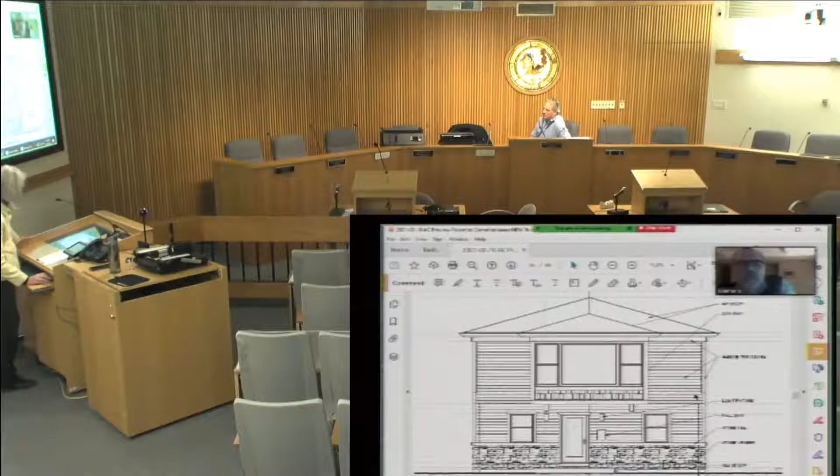There's something a little troubling to me in this elevation. Actually, a couple things. I'm not quite sure, are you showing siding on the whole house now? Yeah, stone veneer for, I guess, kind of a wainscot.

Is that new or existing stone veneer on the base? It will be new. Okay, and what is that above it? The Hardy siding? You've got a couple problems. First of all, you don't have enough masonry on this, because on a project of this scope, you need at least a minimum of 50%. So there's a problem in that you're not doing that.

And secondly, if you go back to your drawing, your second floor window sticks out like a cyclops when you're looking at this elevation. You've got two very small windows on the first floor, and then this large window on the second. It just doesn't scale out, it's top heavy in design. So the solution is less obtrusive on the top and a little larger on the first floor.

For windows? Yeah, it just doesn't look right. That's for the front of your house. It'd be one thing if your living room was on the second floor looking out, but you've got these two small windows on the front. I know the one on the right on the first floor is probably existing to remain, correct? That's correct. The one on the left, you're taking out a large picture window and putting in a smaller one. Conceptually, I'm curious about that.

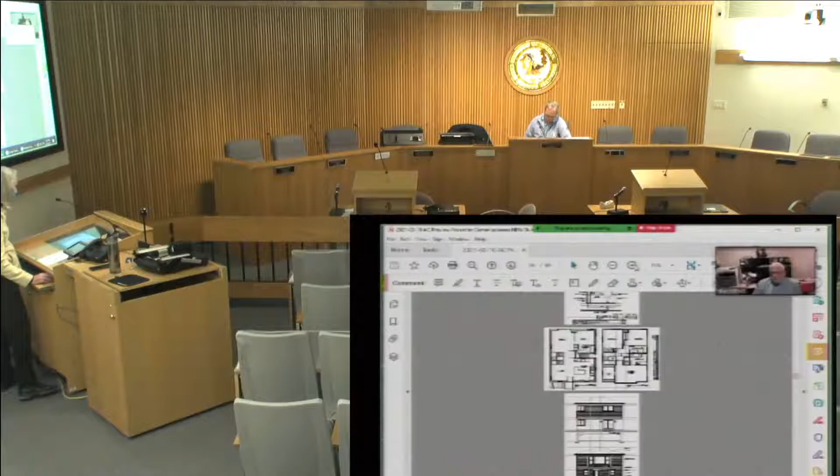There was talk about having this be like a permanent bench. If they put a permanent bench in there, do they have to go to the zoning board? Well, if the floor joists protrude out, then it's the same thing, because the bench could be removed. So we would allow it if the bay was sticking out above the floor line.

So I'm just suggesting if they did 2x8, they can give it the look without necessarily having the floor area underneath it to walk on. Sir, do you understand what he said? Yeah, I'm writing everything down. I'll discuss it with the architect as well. Sure, and Nathan will talk to you about it too. Okay, thank you.

Okay, so Tom, do you have enough to make a motion? Yeah, I do, Mike.

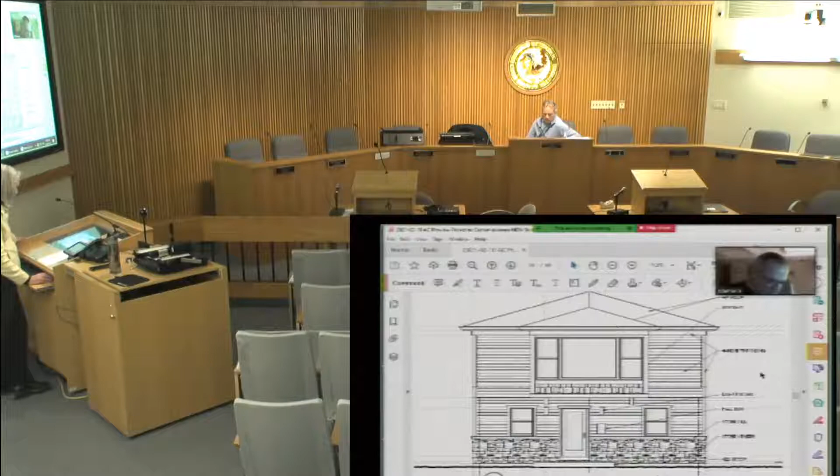Some thought might also be given to reducing the size of the second floor bay, just to make the first floor windows and the second floor windows look a little bit more compatible. And I think that should get you to the 50% masonry requirement, and there is still the need for the addition of a sprinkler system.

Anybody second? Okay, all in favor? Aye. Any opposed? No opposed, so passed.

Please work with staff and they'll take you through all this stuff, because I'm sure some of this gets lost in translation. Okay? All right, good luck. Thank you. Sure.

We're going to move on to case 2021-005A at 5225 Golf Road by Chris Lynn DMV. It's a commercial first floor addition. Staff comments are that staff has no objections with the overall design. Technical items to be addressed include a tree removal permit, rooftop HVAC screening, and possible additional formal review of the existing special use permit by staff, not by us, the Plan Commission, and/or the Village Board.

Who's representing the petitioner? We have two. Mike Mathis from Lindenwood Park. Can you raise your hand? And Ken Just as well. Who else? Okay, Ken, do you swear or affirm to tell the truth, the whole truth, and nothing but the truth?

Great, okay, let's take a look at the drawing. So Golf Road Terminal, north is to the left on this elevation. The proposed addition is in this area. Actually, the renderings will probably do it better justice. Here's one of the renderings, looking northeast.

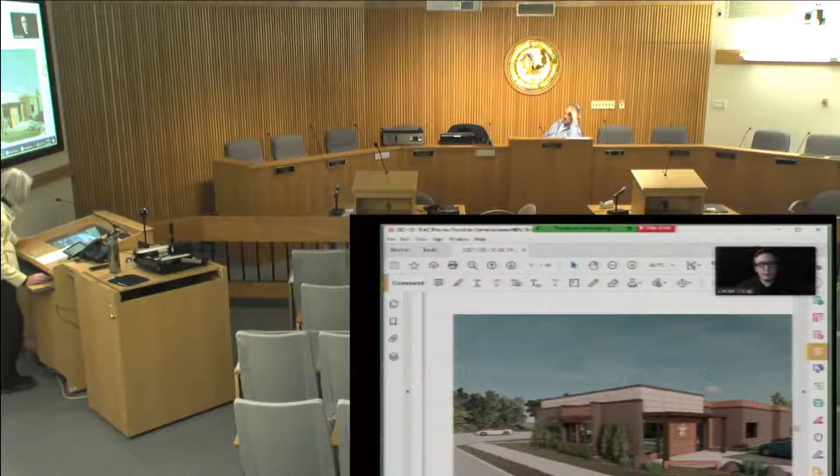So that's the addition we're looking at, right? We're protruding to the south into the parking lot area. Yes, so it's in the rear of the building, not Golf Road facing, correct? Correct. Okay, and we're matching all existing materials? Well, the existing brick is going to be painted. So it's not just the addition in the back...

This is a whole new look? Carrie, could you put up the pictures? It's got a mansard roof, Mike. Yeah, so we're updating it, bringing it into the 21st century. Good, we're going to get rid of that? Yeah, so we are doing facade enhancements around the perimeter. Sure, no, it looks great. So it's an addition plus an elevation update. Yes. Cool, what's the material at the top, at the parapet?

It's going to be a composite wood. Okay, so is the building getting re-roofed? Yes. Okay, good. And just for clarity, that wood piece you see across the top is an extension to the parapet, so we're adding that height to the structure. But that parapet, according to that elevation, looks like it's set back a little bit, correct? Yeah, we're building that parapet wall setback to provide a step from the masonry cap to where the wood cladding extends up.

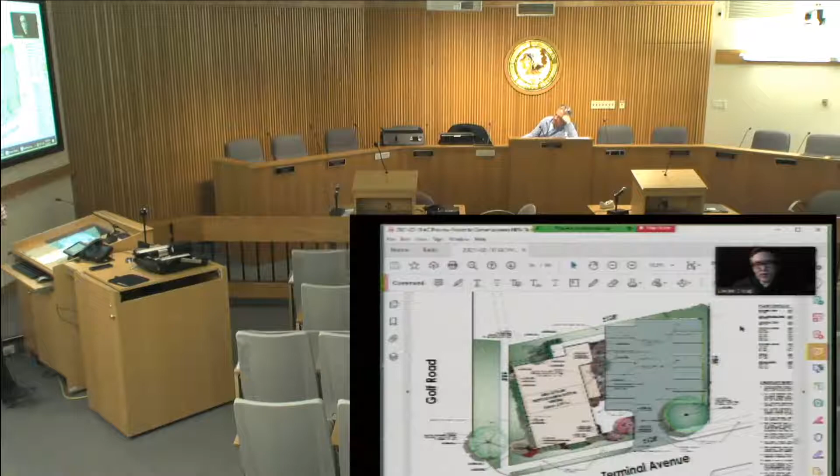But certainly, I know he's listening on the meeting, and we can look at that again with him. Yeah, just something like crab apples, they come in all different forms, and you might be able to get the same form, they'd be a little tougher with all the hardscape. We're just trying to make sure you don't plant a tree that in 5 years you're not gonna be happy with.

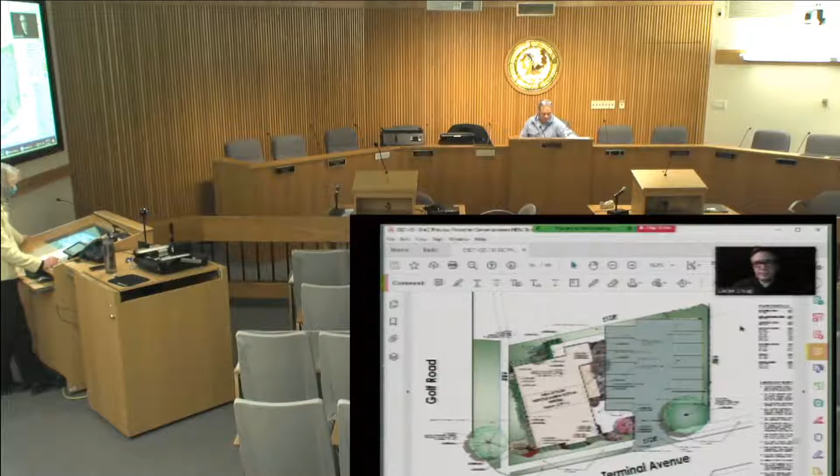Okay, great. Does somebody want to make a motion to approve? Okay, I'll make the motion. I move that a certificate of appropriateness be granted to case number 2021-005A at 5225 Golf Road as presented. Anybody second? I second. All in favor? Aye. Any opposed? No opposed, so passed. All right, thank you very much, gentlemen. Good luck.

We're gonna move on to the final case, case 2021-008A at 3900 Dempster Street, Dunkin' Donuts, new construction. Staff has concerns with the design. I'll read these, but I understand there are new elevations being presented tonight. Suggested modifications include more masonry, fewer signs, and reworking elements of the corporate prototype so the design is more site-specific to this scrape and build project. The proposed building setback is roughly 70 feet, greater than the existing 46.5 feet setback, and is currently aligned with other buildings on the block, including ZAD and Burger King. Therefore, it's recommended that features be added to the site plan to continue this line.

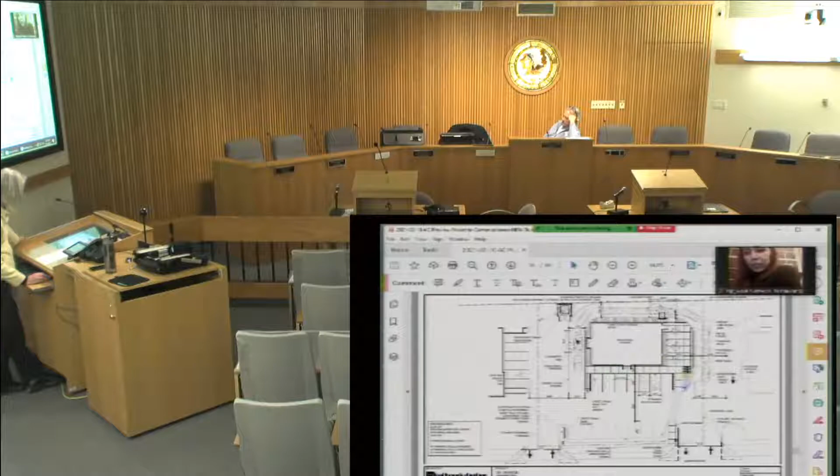Okay, so this is existing—Zad is here, and Burger King is roughly over here. And the proposal is a building set farther back, with a drive-through. Is this the current proposal or a revised proposal?

The site plan didn't change, just the elevations and signage.

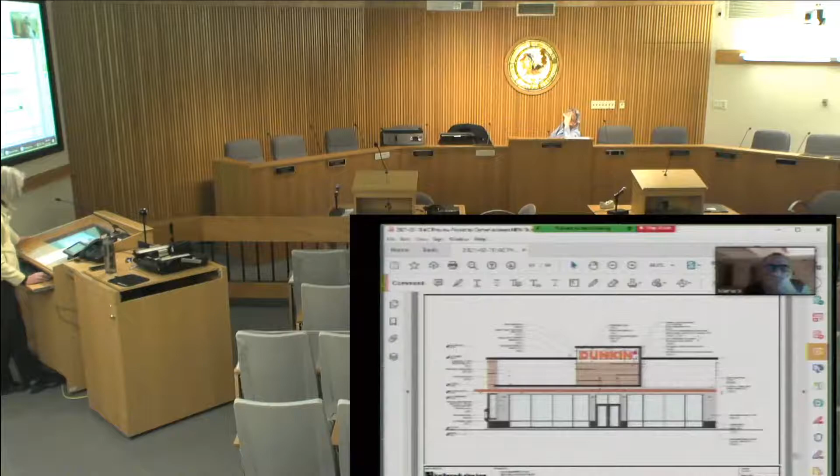I thought when I saw the earlier renderings this was a darker building, and now it seems lighter. Does somebody from Dunkin want to respond? Am I wrong or am I right? The colors haven't changed, this is the architect speaking—we played around with the massing a little bit here and there, but those are the standard brand offerings.

Stephen, give me a quick rundown of your materials, starting at the top and going down. Starting at the top, it's typical metal coping, then cementitious panel systems throughout. There's a Hardie board, another panel system at the sign itself, as well as down below. The orange band is a metal element added to the building that wraps around.

And then just a lot of storefront on the front elevation. If you look at the side elevation, you see a lot of color variation, that dark charcoal at the rear that starts at that point and wraps around the back of the building—again cementitious panels, but that's lap siding.

So it's in theme with the newer Dunkin' Donuts. That's correct—the newer Dunkins have gone through a lot of iteration changes to come up with it. The latest and greatest.

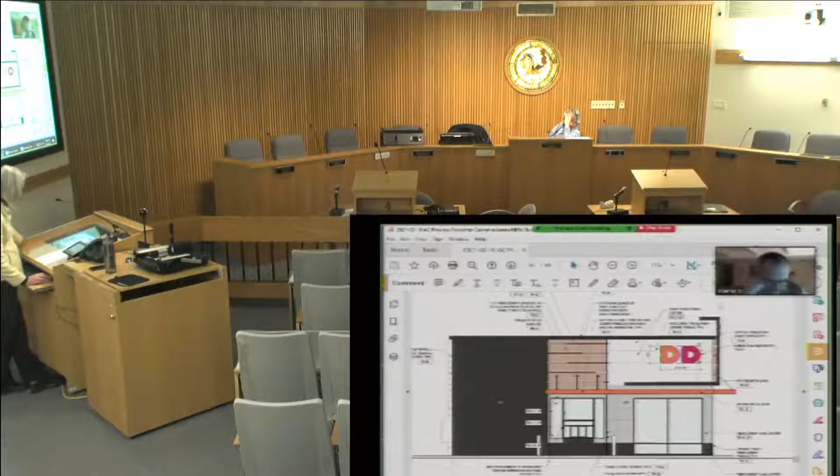Well, I don't have any necessary jurisdiction to say move this thing closer to the front line of the others—that would be someone else within the village. But as I look at these elevations, I personally don't have any issues. I don't know if any of the commissioners have any issues.

Mr. Chairman, if I may, the main reason the building was pushed back is to rectify the drive-through experience—if someone wants to put up the site plan, we spent a lot of time making the queue much better than before, with more cars able to queue. Pushing back is actually a drawback for our clients since they're not up front anymore, but it gives better parking arrangement in front instead of the weird parking behind, and a much cleaner queue for the drive-through. Having visited there, I would completely agree with you.

I don't disagree with that, I'm just responding to a comment written by other staff people. Certainly, I just wanted to make it clear why. No, I understand—there was, from a logistics standpoint, way too much room in the back. So I understand why you did that, because you really just wanted a drive-through lane back there, not dock space or garbage space.

Does any of the other commissioners have any comment on this? Okay, the setback doesn't bother me, yeah. Okay, Arshani, you want to make a proposed motion for this?

I make a motion that a certificate of appropriateness be granted for case number 2021-008A, located at 3900 Dempster, as presented. Anybody second? Second. All in favor? Aye. Any opposed? No opposed, so passed.